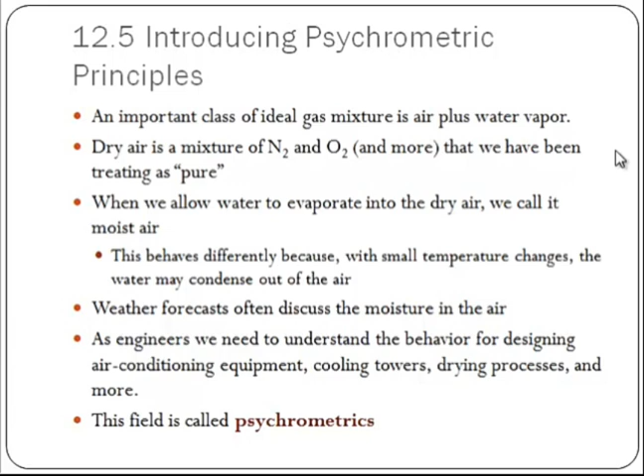Then we come to the term called relative humidity. Relative humidity is expressed as a percentage, indicating the present state of absolute humidity relative to the maximum humidity at a given same temperature. They can be related by ratios.

We determine mathematically the humidity ratio, known as specific humidity. Omega is equal to mass of water vapor to mass of air, which by partial pressures is mass into partial pressure of water vapor to mass into partial pressure of air. Since Mv by Ma, the mass of water vapor to the total mass of dry air, is equal to 0.622, the humidity ratio can be defined as omega equals 0.622 times the partial pressure of water vapor divided by the total pressure minus the partial pressure of water vapor.

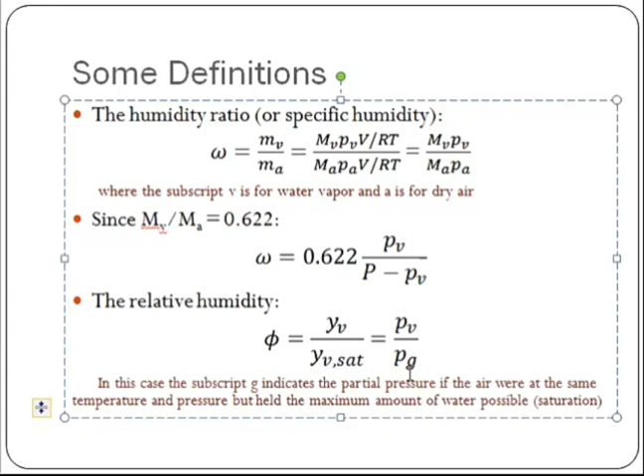Now we come across two other terms, enthalpy of the moist air. Enthalpy is mainly defined by the symbol H. Enthalpy by mass of air is equal to enthalpy of air plus the absolute humidity into enthalpy of water vapor, equal to enthalpy of total air plus absolute humidity into enthalpy of water vapor. You can estimate the enthalpy of vapor as approximately equal to the enthalpy of water at the same temperature and pressure.

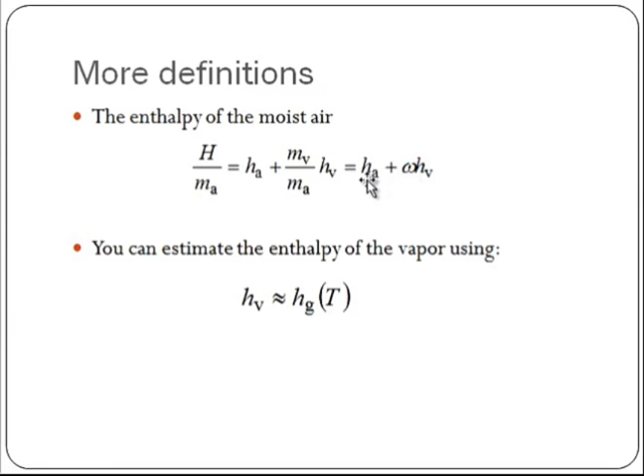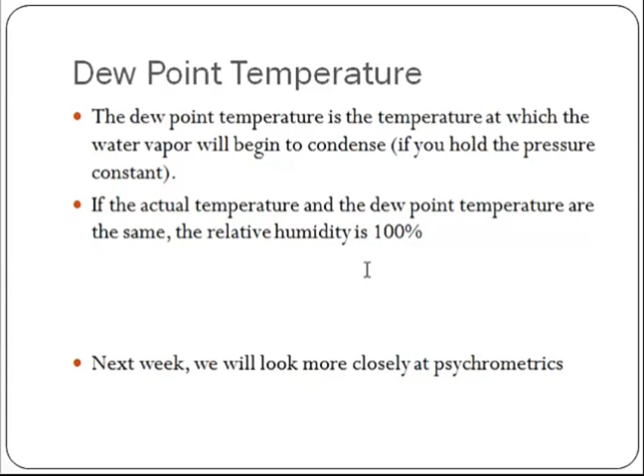Now here comes another major term, the dew point temperature. The dew point temperature is the temperature at which water vapor will begin to condense - the starting temperature at which water condenses when pressure is a constant value. If the actual temperature of the air and the dew point temperature are the same, then the relative humidity is equal to 100%.

Now let us see the chart known as the psychrometric chart, and learn the basics of how to use it. By using the basics, we come to know how to find the values. Let us begin.

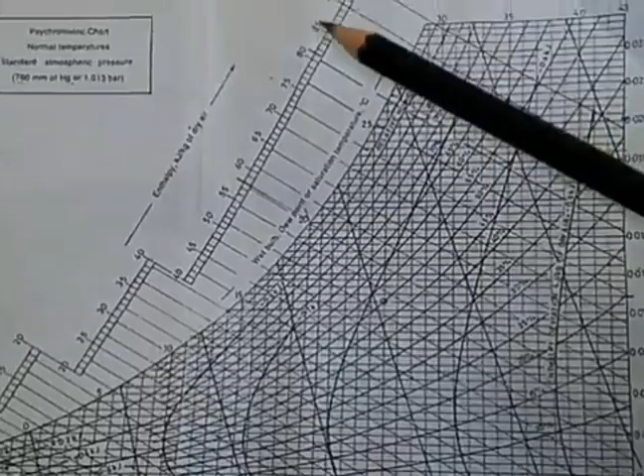This is the psychrometric chart. We're going to use it and learn how to mark the values in the psychrometric chart.

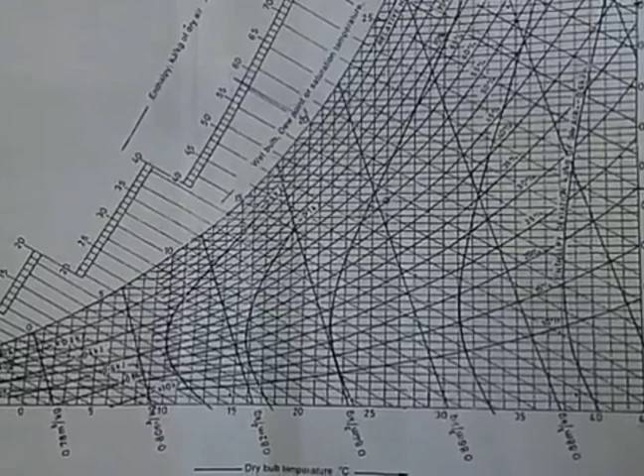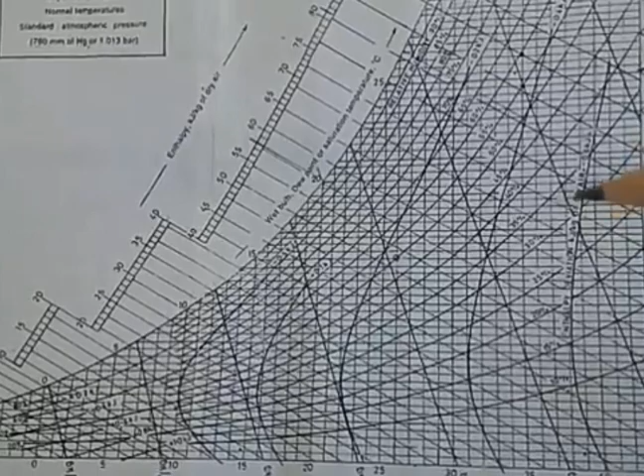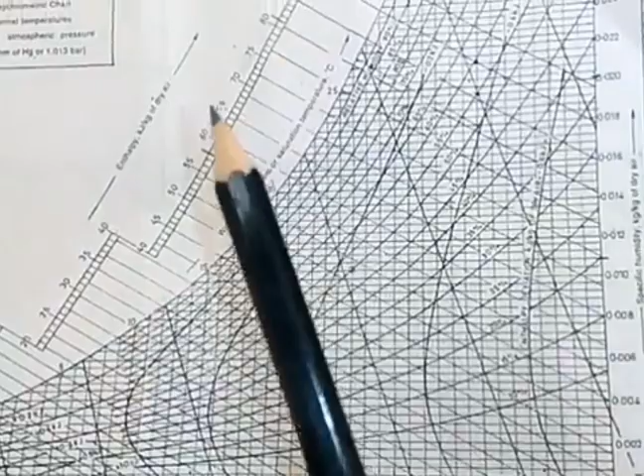At the right side, we come to know some values we already mentioned - the specific humidity of dry air. To the right of specific humidity we have certain values called the sensible heat factor. In the psychrometric chart, the normal and standard atmospheric pressure are 760 mm Hg, or 1.013 bar. These are the standard values at which the psychrometric chart is set.

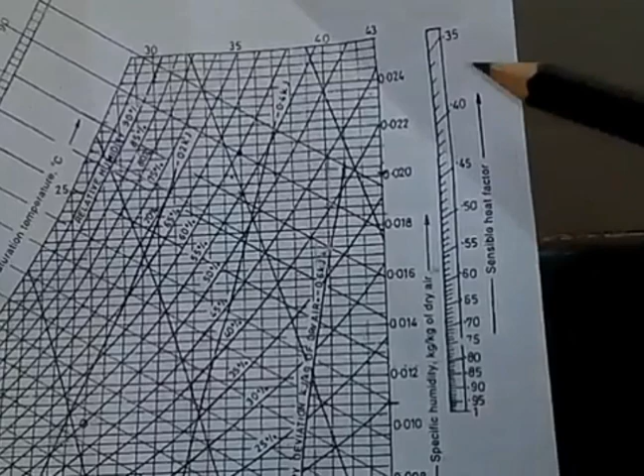This is the basics of psychrometrics, and now we see about how to use the psychometric chart.

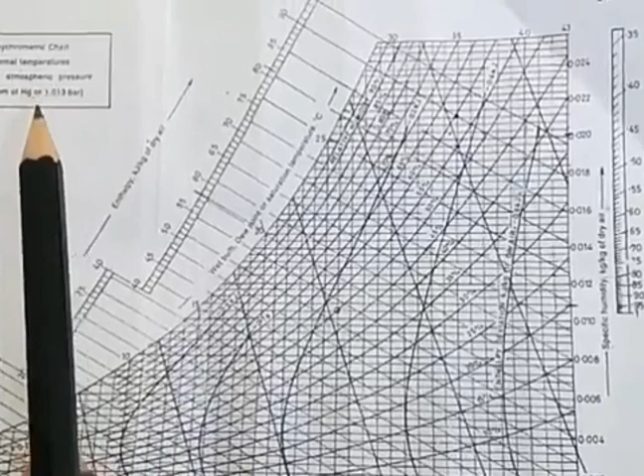As we know the value of wet bulb temperature and dry bulb temperature, we plot a point from which the enthalpy of the air is determined. By marking the wet bulb temperature from the left and the dry bulb temperature from the bottom, we come to a point of intersection. From that intersection we go left and read the values of enthalpy, and we can also get the values of specific humidity, mentioned on the right side of the chart. This way, the psychrometric chart is used and the values are plotted.

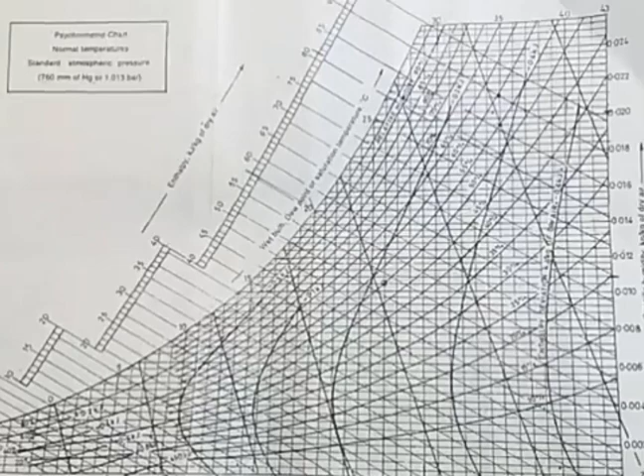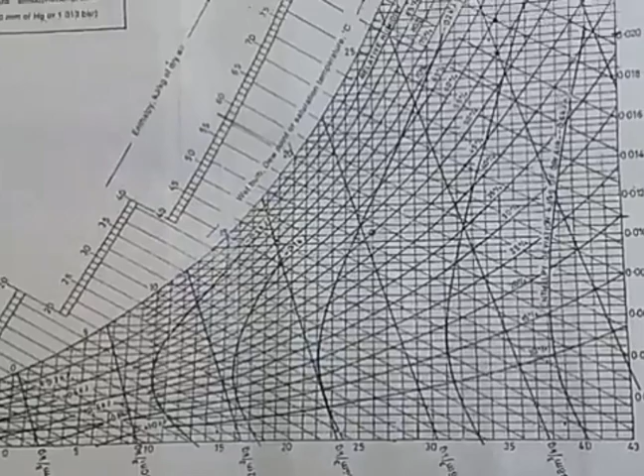These are the basics of psychrometrics, and we came to know about the use of the psychrometric chart, and we also saw how to use the psychrometric chart. Thank you, friends.